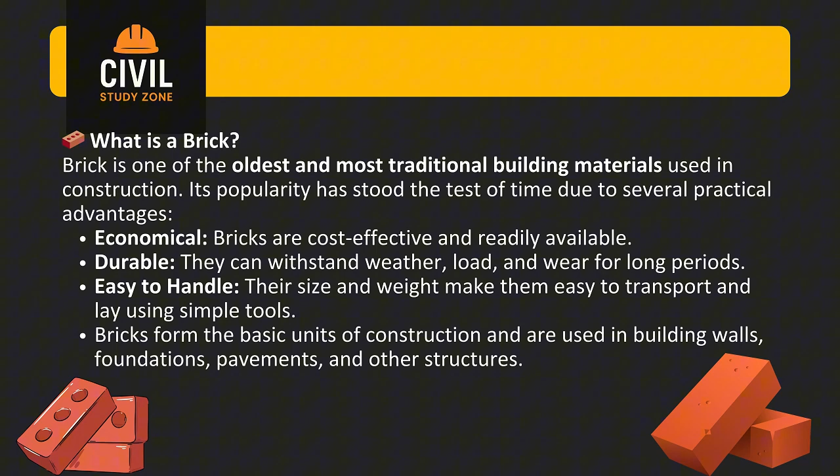Bricks are one of the oldest construction materials in human history and they've stood the test of time. Why? Because they're economical, durable, and easy to work with. They form the backbone of walls, pavements, foundations, basically, your entire built world. They're easy to transport, easy to lay, and ideal for strong, long lasting structures. Bricks are perfectly shaped for human hands, rectangular, and designed for speed and simplicity on site.

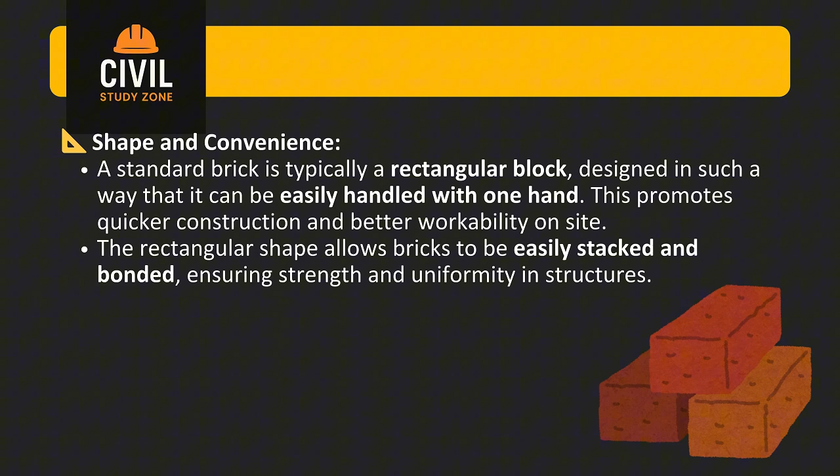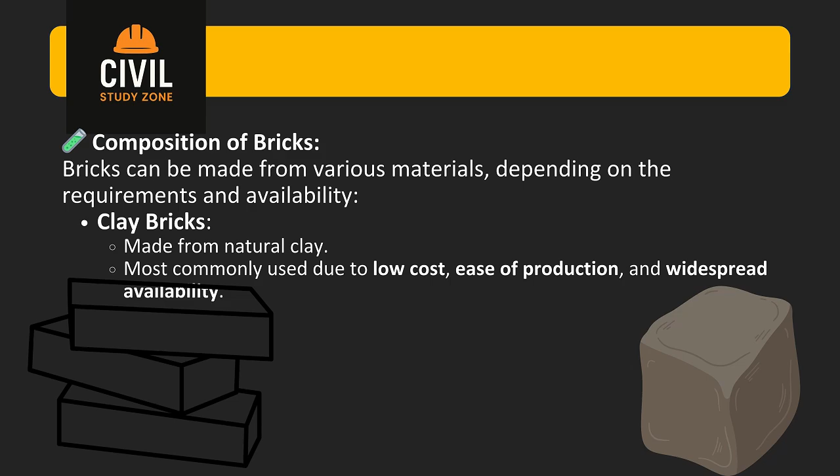This shape means faster work, stronger bonding, and uniform structures. So, yes, there's science behind that shape. From stacking to strength, the shape promotes efficiency in every bricklayer's hand. Not all bricks are the same. Depending on what's available and required, we use clay bricks: natural, low cost, widely used; sand lime bricks: smooth and uniform; fly ash or OPC bricks: eco friendly and industrially strong. Every type of brick serves a purpose in modern construction.

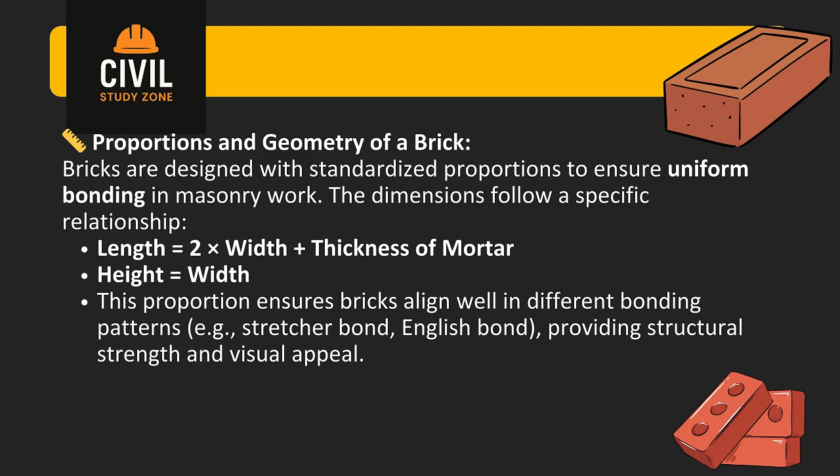A standard brick isn't just a block, it follows smart proportions. Length equals 2 times width plus thickness of mortar. Height equals width. Why? To ensure they align properly in masonry bonds like English or stretcher bond, giving both strength and symmetry. The ideal weight of a brick is between 3 to 3.5 kilograms. Why is this important? Because it's heavy enough to provide stability, yet light enough to be handled by masons all day long. Engineering isn't just strength, it's balance and practicality too.

Ever seen a depression on a brick? That's called a frog. It has two important jobs. Branding: the name of the manufacturer is pressed into it. Structural: it locks in the mortar, creating better bond strength and resisting shear forces. Yes, even a frog strengthens your walls. Standard frog dimensions are length 10 centimeters, width 4 centimeters, depth 1 centimeter. These are enough to fill mortar without weakening the brick. Precision makes all the difference when your goal is strength and symmetry.

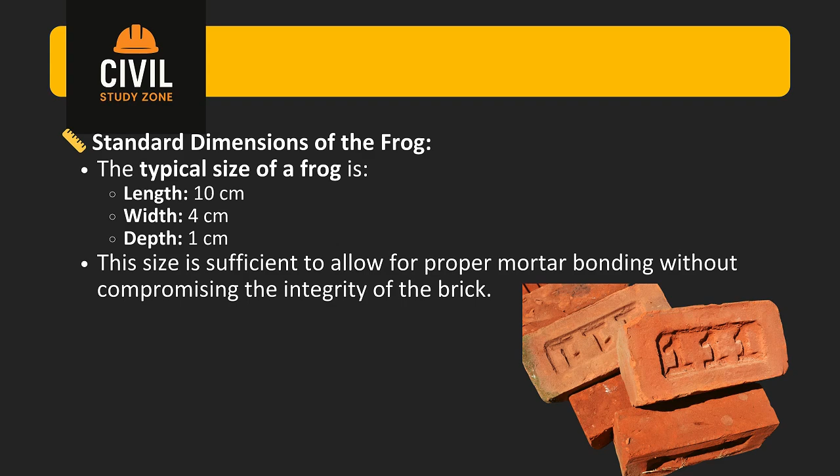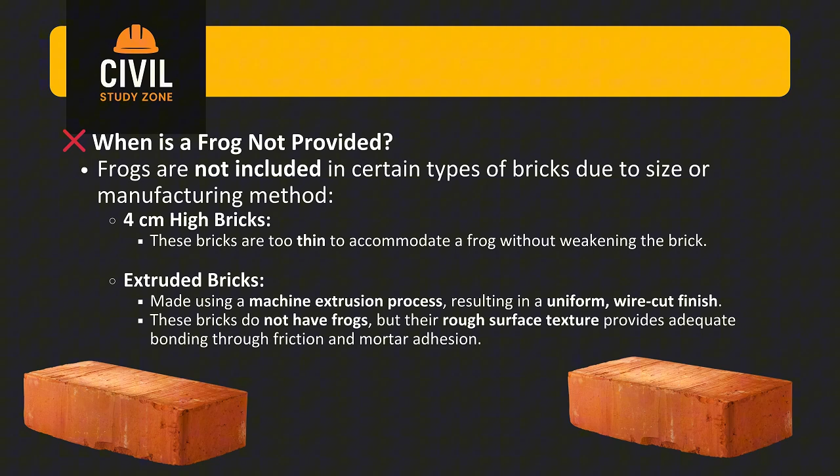Sometimes bricks come without frogs. Bricks with only 4 centimeters height are too thin for a frog. Extruded bricks made by machines have no frogs, but their rough texture ensures they bond well. So remember, a missing frog isn't a mistake, it's often by design.